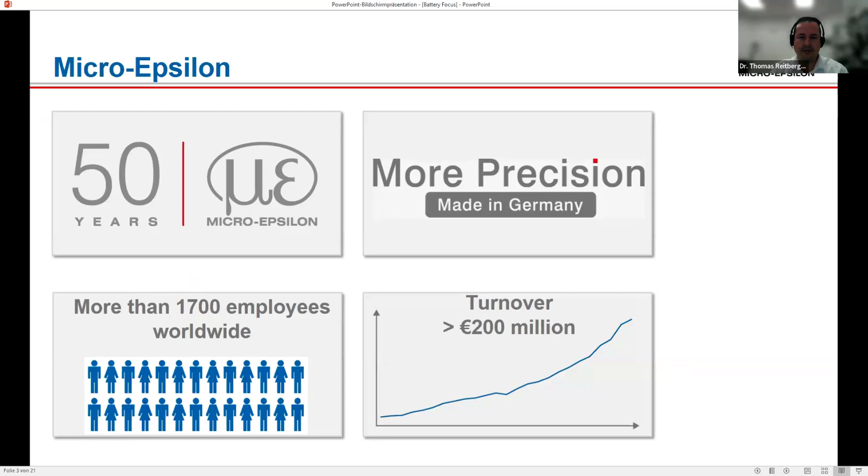And we do this by a lot of sensor systems, and we will also have a quick look at our portfolio here. Nowadays we are more than 1,700 employees worldwide, and we also have over 200 million euro in turnover. So perhaps more exciting for you is the product range we have. As Carl said, it's one of the broadest product ranges in the market.

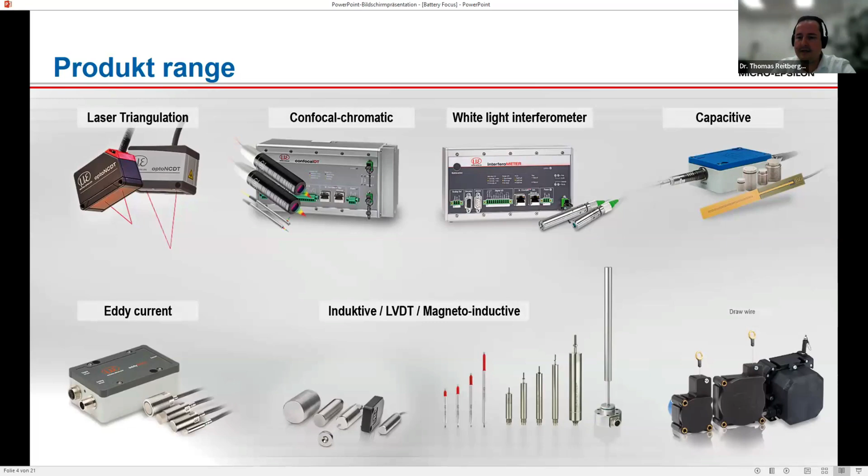It begins with laser triangulation systems. We also have confocal chromatic systems, white light interferometers, capacitive sensors, eddy current sensors, inductive, magneto-inductive sensors, draw wires. Even when it comes to 2D, 3D laser scanners, we have them in the portfolio, and the 3D snapshot sensor, one of which will be the focus today. We can even build up whole measuring systems where our sensors are integrated for bigger projects. And we have optical micrometers, fiber optic sensors, color sensors, thermal imagers and pyrometers, and also laser distance sensors. So as you see, the portfolio is really a wide range.

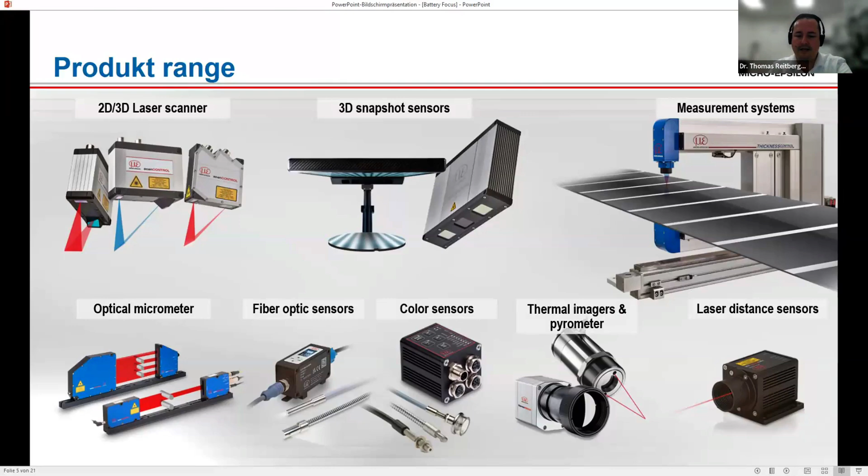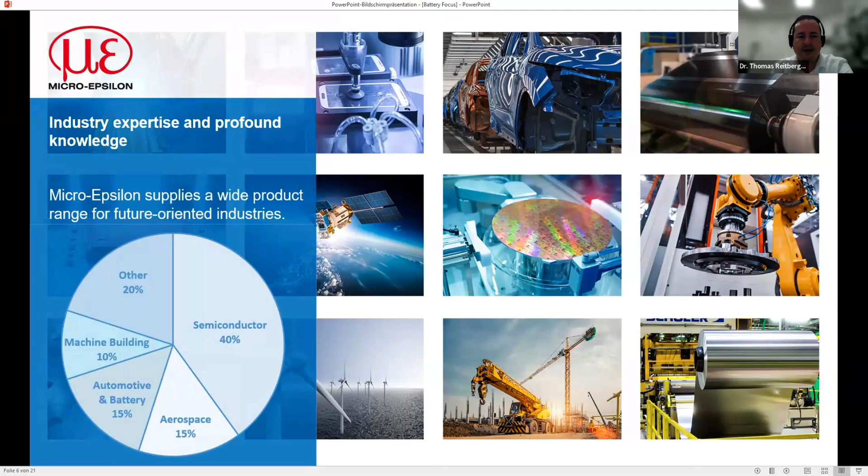But we want to focus today on EV battery production. So here is just an overview of some projects we are in. The industries we are mostly in are the semiconductor industry, automotive, aerospace, machine building, and also other industries, of course.

So we want to focus on the EV battery today. So for us, the production of the battery foil is a crucial thing. And here we have different sensors in the portfolio which could help you solve your measurement problem, beginning at a thickness measurement of the foil done two-sided, which we do confocally.

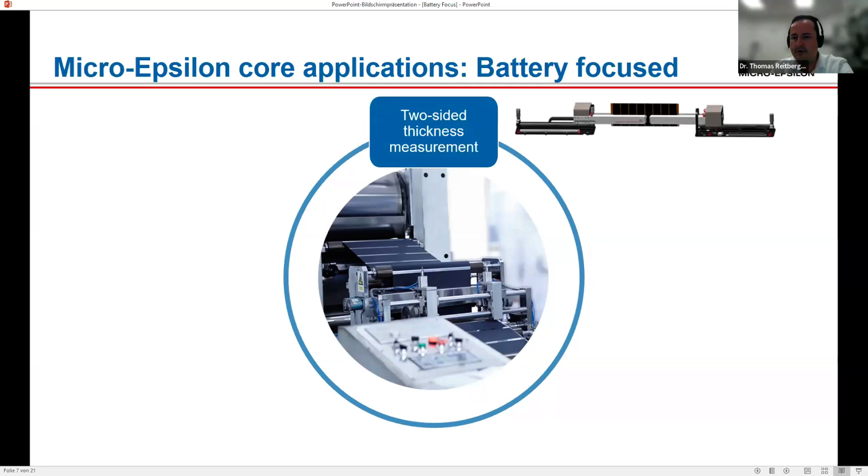And we could also measure the gap between two shiny rollers, and this is done with a special sensor especially designed for the roller mapping. Then we could also have a look at the drying behavior based on a pyrometer sensor. We can measure the heavy edge on both sides.

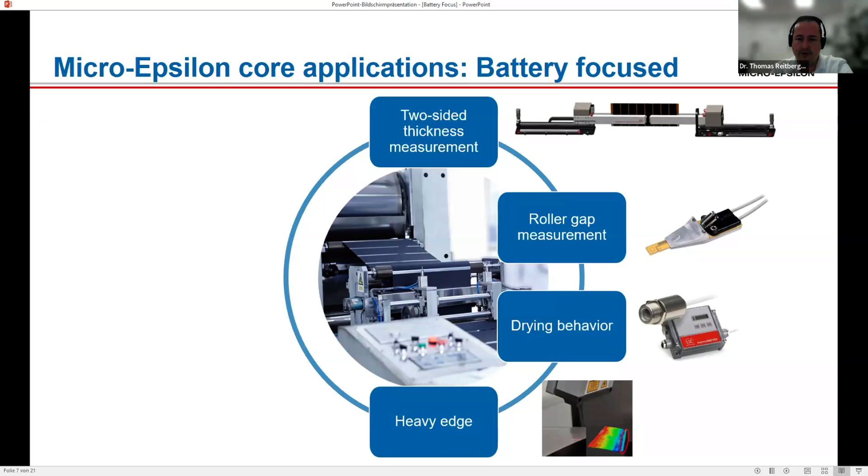So when the foil is applied here, there is often a problem that it isn't applied that perfectly. And we could also have a look with our 2D sensors here. And it is also possible to do a one-sided thickness measurement on the active material, or measure the thickness of the anode or cathode material, here done with a point sensor.

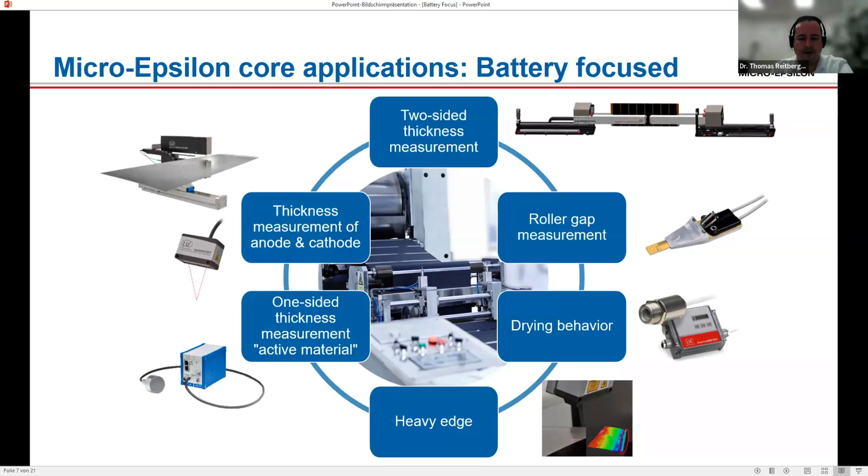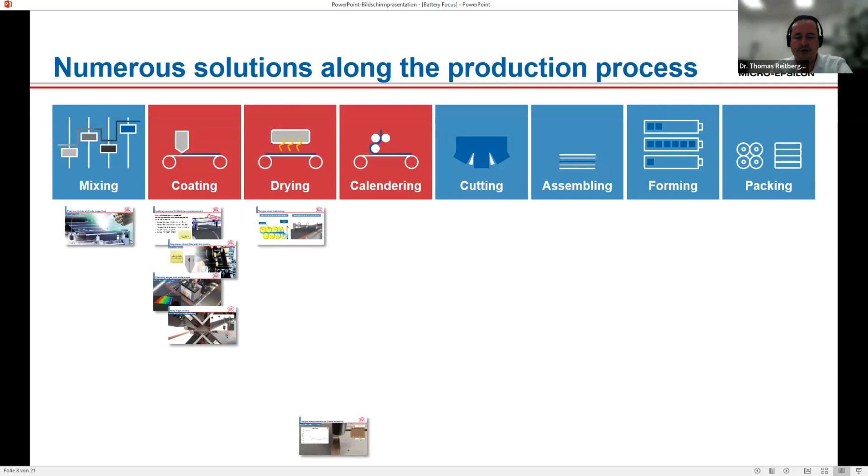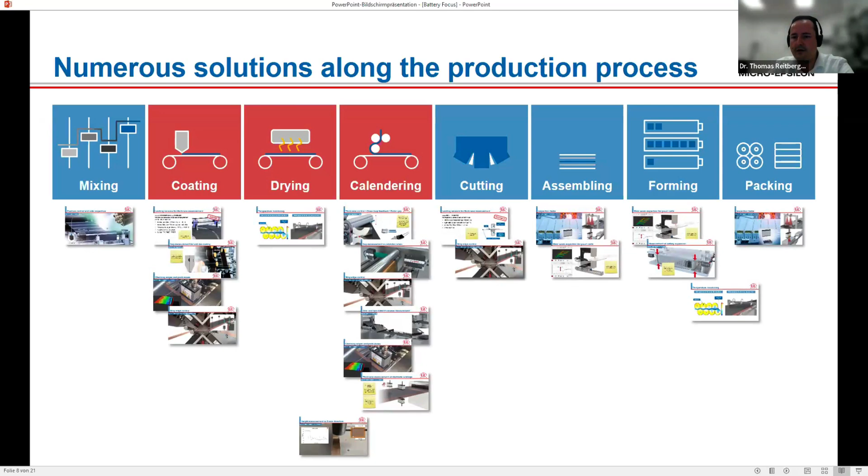So we have a look at the whole production process shown here. For us, it begins with the mixing, where we have solutions in this case. And the coating, where we have several projects. Then the drying process, which is controlled. Then the calendering with several projects, and also the cutting, the assembling, and then also the forming of the battery itself. And in the last step, the packaging, we can also have a look at the packaging.

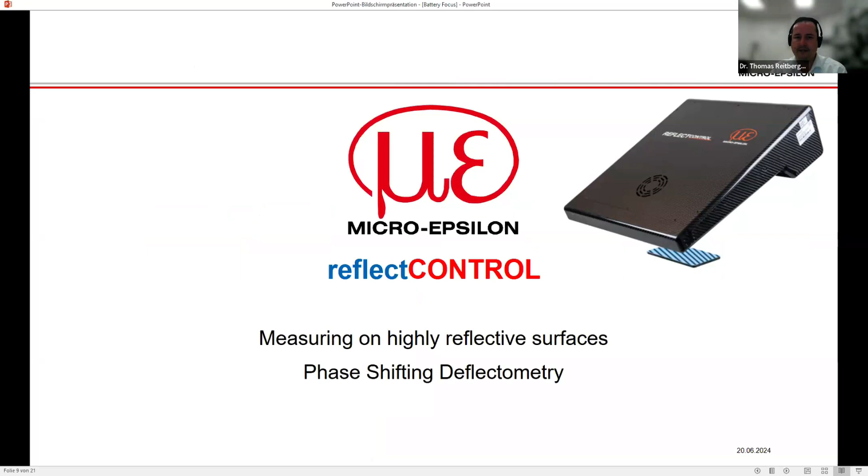So the main focus for us today is the reflectCONTROL sensor. And as I said, it is designed especially to measure on highly reflective surfaces, so especially in the EV production, we will see some examples where you can use the reflectCONTROL sensor. We call the measurement principle here the so-called phase shifting deflectometry. So what is phase shifting deflectometry?

So here on the right-hand side, you can have a look at the sensor from a little bit below. As you see, you have a screen and you have two cameras. Then you put your reflective surface below, and on the screen, a sine pattern is projected to the surface. Then it is possible for the cameras to see the direct reflection of the reflective surface and transfer this into a camera image. By doing so, you have the opportunity, on the one hand, to generate 2D images, which are an important thing for us, so that LandingAI has the opportunity to really get the defects out of it. And also we can calculate the 3D point cloud.

So how the results are generated: on top of the right-hand side, you see the projections we are doing to the target. The sine pattern is projected at least 4 times to the target, 2 times in horizontal, 2 times in vertical direction. And by overlapping these images, we have the opportunity to generate 2D images, we call them amplitude and curvature image, and also calculate a 3D point cloud.

So the recording time for the sensor is approximately 2 seconds. In these 2 seconds, the sensor and also the target have to stand still. After this, you can move your next target below the sensor and do the next measurement. And the processing time, which comes afterwards, is about 3 seconds. So to have one complete measurement with the 3D point cloud and the 2D information, it is roughly 5 seconds, always depending on how many projections you want to have and on which data processing you will need.

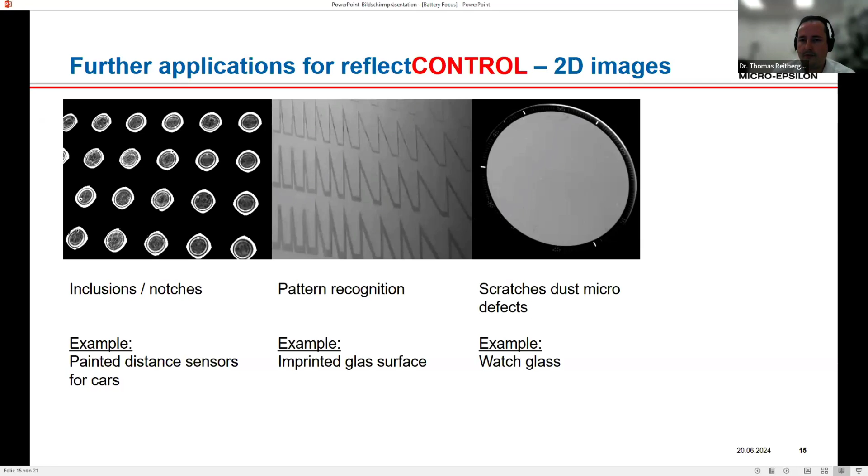You can also do measurements on glass. And in this case, we did a pattern recognition of an imprinted glass. And there the customer could see also if the pattern is formed right. Another example is a watch glass. And here, a small scratch, and it's really only a nanometer scratch, goes from the right end to the top, and this made it a scrap part for this customer here.

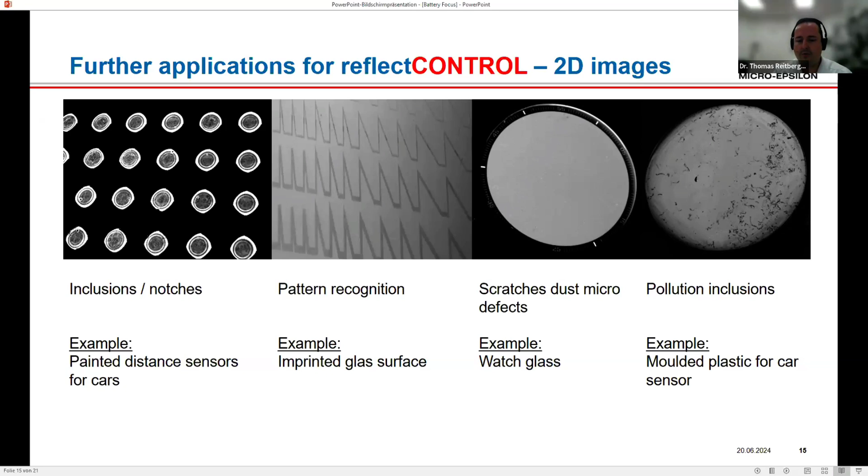And the last example I want to show you would be a molded plastic for a car sensor. Actually, it's the molded plastic for a rain sensor, which is in front of your car. And if it would be polluted as this, then your rain sensor wouldn't work correctly anymore. So this is so far what I want to show you when it comes to the 2D images.

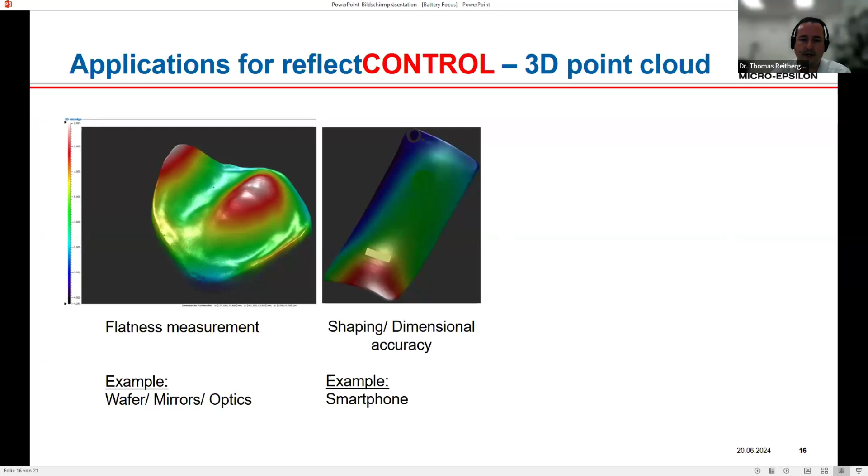And what you also can see here is what the sensor is capable of, because even these minor defects can be seen in the 3D point cloud. Another interesting example for us is the shaping and dimension of smartphones. So today the smartphone backsides and also the front sides are very shiny, and this makes it possible for us to do a measurement based on the 2D data for seeing the defects, and also 3D point cloud for having a look at the shaping and dimensional accuracy.

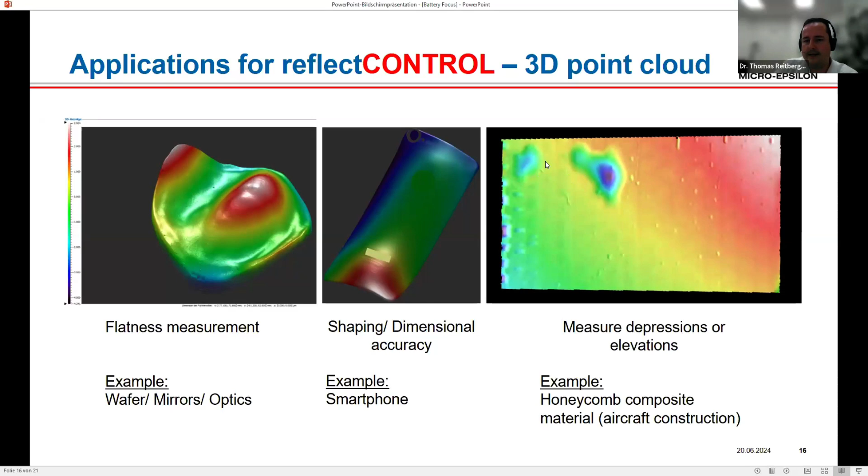And the last exciting example which we had here was in aircraft industry. You can see here a part with a honeycomb material inside, and then a prepreg material which is brought to the top, and then in a baking process it's formed out. And inside this baking process, there might be a damage to the honeycomb. And as you see here, there are 2 areas where the honeycomb has a defect. And this could also be seen and measured in the 3D point cloud.

So now you might think, okay, normally if I have a shiny surface or a glass or a transparent material, I could just go and use a confocal sensor. And you're right, you can do this. And for this, we tried to do a measurement with a confocal sensor and our deflectometry sensor, and put the images next to each other. And what you see here is a polished slab which has a dent inside a dent.

And on the left-hand side, you see with the point-to-point sensor, to have the whole surface covered of 30 millimeter to 30 millimeter field of view, you would need about half an hour. On the right-hand side, you will see the deflectometry result, which you get in about 5 seconds. So this is a massive time saving you can have here. And as you also see, the quality of the result is very comparable.

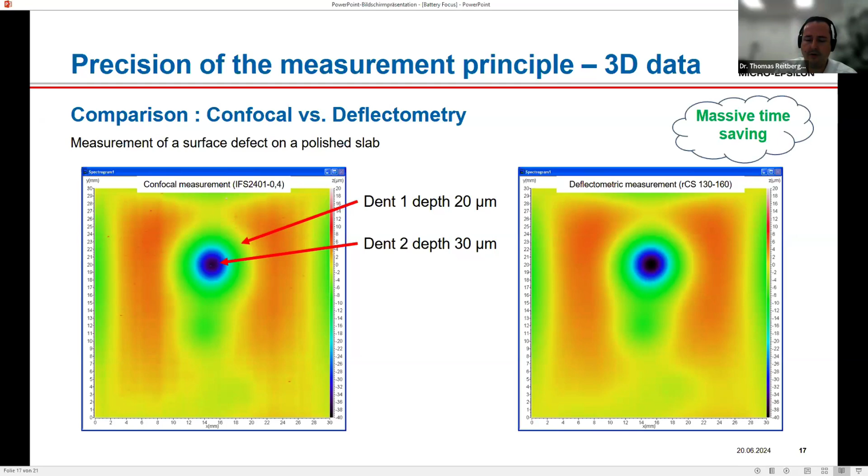And if you go one step further, you could also say, okay, but I could use an interferometer for these measurement tasks also. And yes, of course, you can do so. But on the one side, if you just use a point interferometer, you will have the time problem. And if you have an interferometer which can cover a bigger surface, normally also the preparation and the setup for this measurement will take a long time.

You see here a result which is done with a point interferometer from us, and also covering a bigger surface. It's a telescopic mirror, which we had a look at here. And if you look at the difference between the deflectometry and the interferometry result, you will quickly see that there is 50 nanometer difference. So this is, in most cases, more than enough to do it with the deflectometry.

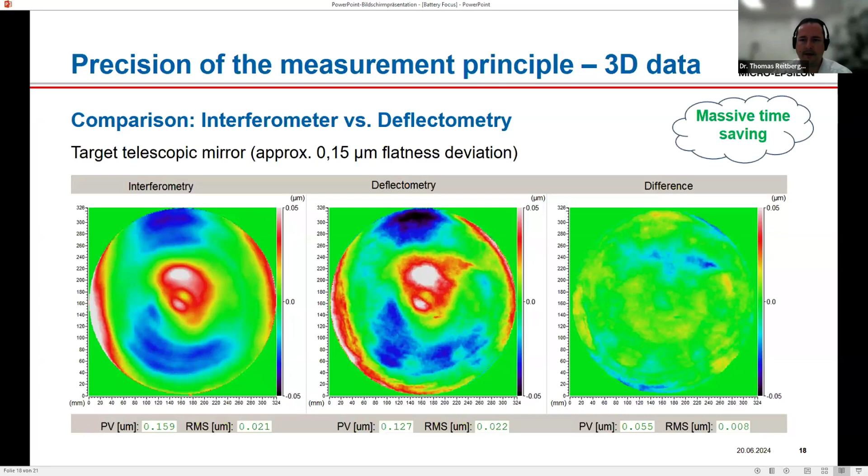So at the moment, we have 2 products when it comes to the reflectCONTROL. On the one side, we have the 2D reflectCONTROL, which has a measurement area of 110 to 245 millimeter. This is the area which can be covered with one shot. And this sensor is only capable of doing the 2D images. So you get the base intensity image, the amplitude and the curvature image out of it.

And on the other side, we have the 3D sensor, which has a little bit different measurement area, which we say is about 170 to 160. But as you see, it's a little bit trapezoid, but this is because of the cameras. They need to look on top of each other, and so this field of view is formed by it.

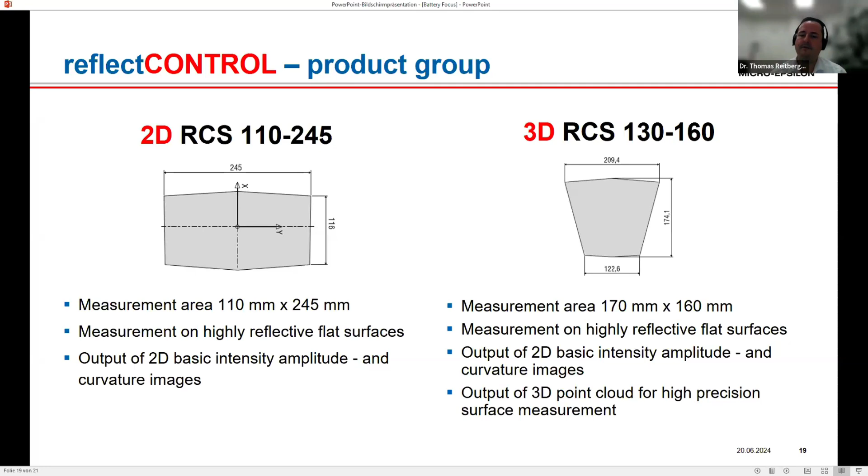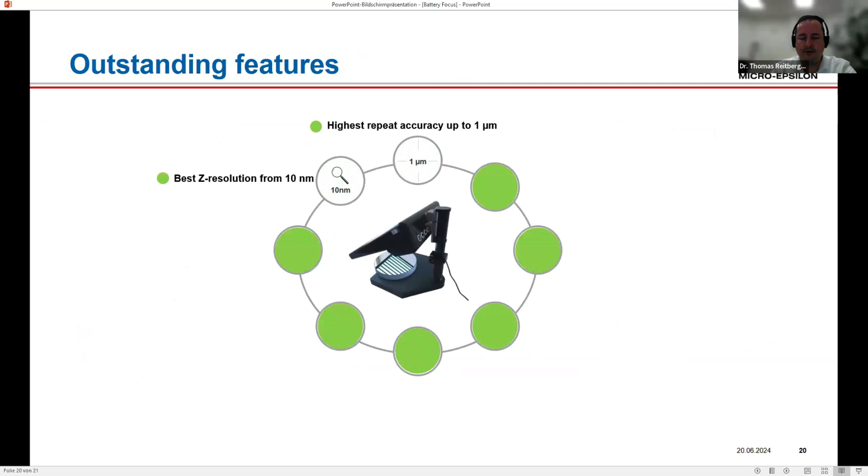So now just a quick overview of the sensor. What are the outstanding features the sensor has here? It's the repeatability, which is up to 1 micron. In most cases, it's in nanometer range. We have a Z resolution, which is beginning at 10 nanometer. We have the 3D Inspect software, and when I show you the live demonstration here, I will also have a quick look at the 3D Inspect software.

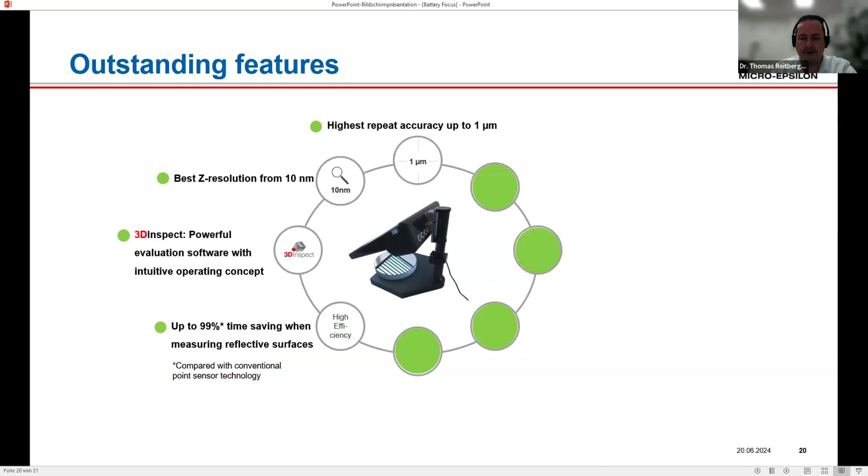And compared to most other sensors which could be used, you have a massive time saving, up to 99% here. What you get is up to 3 to 5 million data points directly out of the sensor, 3D data. And we have also an extensive software development kit. So if you want to do the solution on your own and you're using Python or C++ and stuff like that, then you could just take the sensor as a raw data sensor and write your own solution.

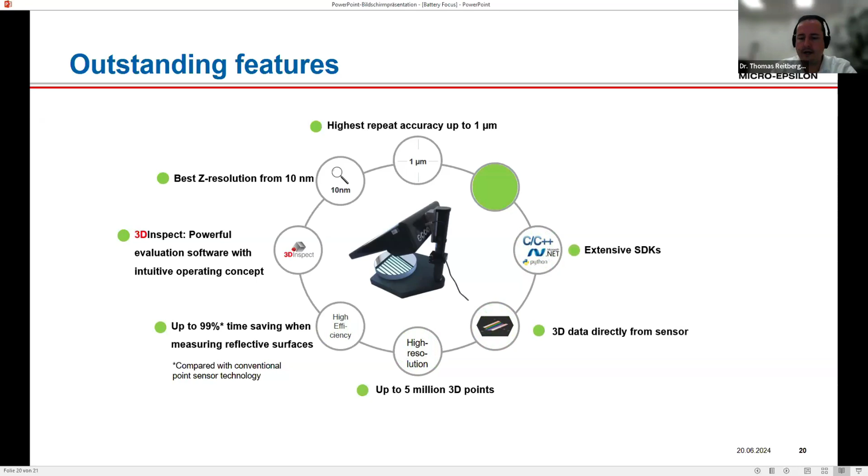And also, all of our 2D, 3D sensors have an open standard when it comes to the camera image. So we use the GigE Vision GenICam standard, and for this, it's most of the time quite easy for an integrator to get the image and do the next steps with it. So to summarize here, when a 3D point cloud is needed, Micro-Epsilon already has outstanding software for calculations on the 3D point cloud.

But for us, LandingAI is such an important partner because all the 2D images which I showed you can be taken by the sensor and are really impressive, and you see a lot of stuff there, but we don't have a solution to say where you have a defect and how big it is. And in these cases, we always knock at Carl's door and say, oh, here is our problem. Carl, can you help us?

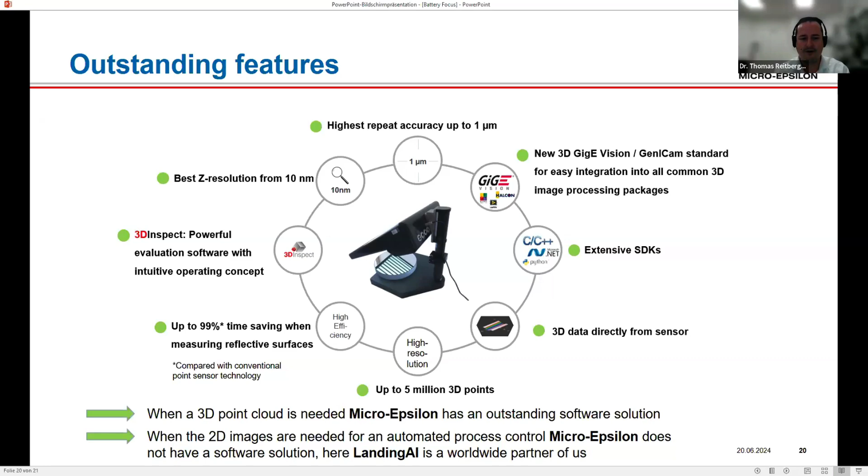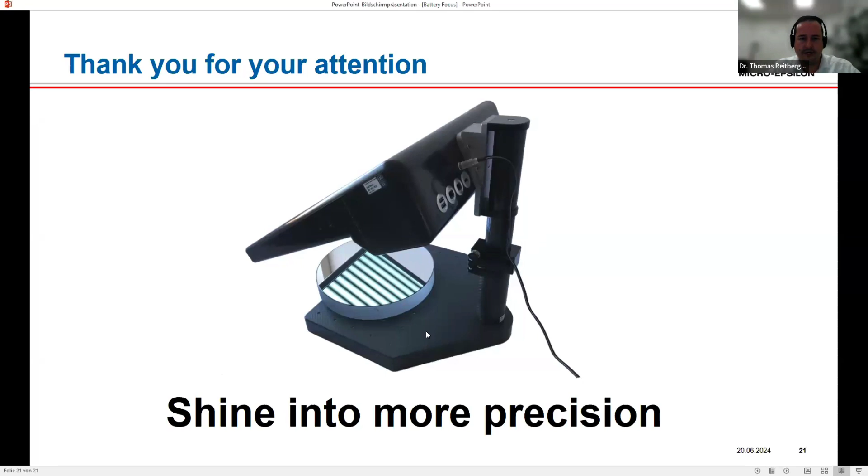So much for the presentation from the reflectCONTROL, or also a short overview. And if you have any questions after that, please feel free to ask. And I would now switch to my live presentation and show you a live measurement on a pouch cell, which I now have under the sensor, which stands next to me.

So we are now inside our 3D Inspect software, and we are inside the display image data. So what you see here is the live view, and I can also put my hand below, so you can now hopefully see my hand, and I can also turn it a little bit. And what I have to do now inside our measurement system is, in the first place, put the object in the middle of both cameras, and the pouch cell is packed inside here. So this is the area which I'm interested in.

Then I can adjust the exposure time to the best I need for an image here, and I could do some further settings. And then I have the opportunity to go, for example, to the 2D images and start a measurement here. And on the left-hand side, you can also see how long the sensor needs to do an image. Then it is reconstructed here. And what you now get from us, as we've seen in the slides, is the base intensity image. So more or less the camera image.

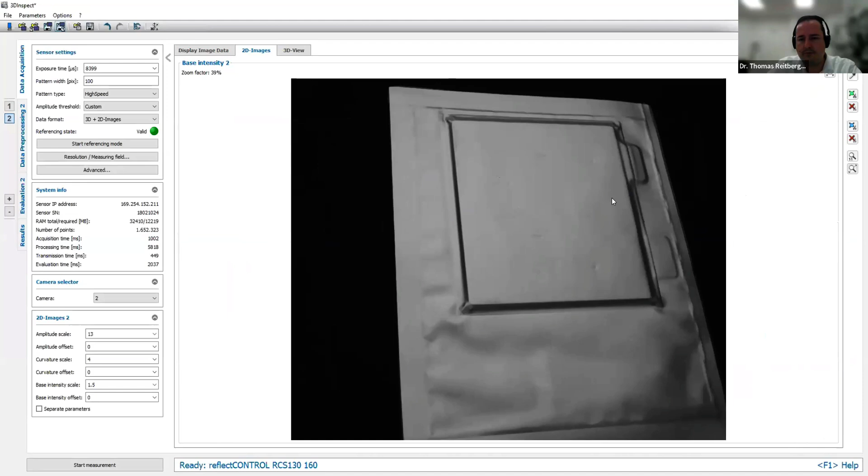I could also scroll in a little bit and have the defects shown a little bit better. We get an amplitude image where we can also see all kind of scratches, defects, some minor dents and stuff like that. And I could also have a look at the curvature image where I can go inside and also see many minor impacts, which probably won't be a failure, but something like this would lead to a scrap part, as I think here in this place. So much from what I want to show you.

What I would have to do now is just to save my images in a format which then could now further be processed by Carl. And with this, I would hand over to you, Carl.

Thanks, Thomas. Just a quick question. Maybe could you say a few words about trying to do the same inspection using a visible spectrum camera, not necessarily using deflectometry? What kind of images would you typically see?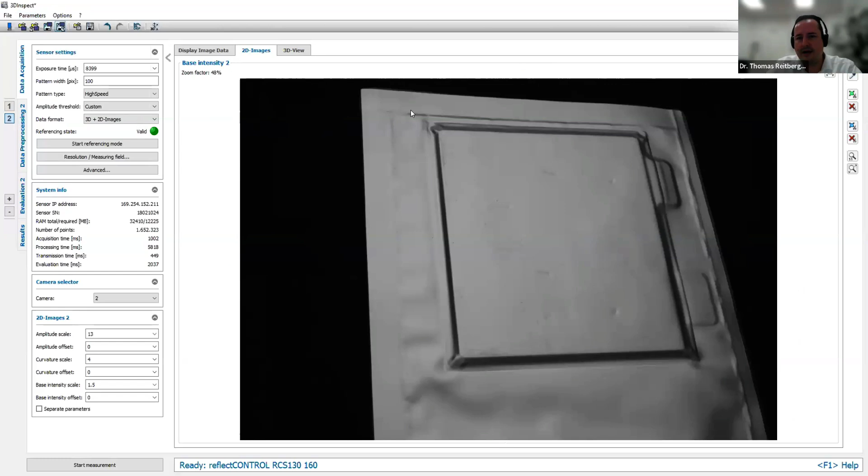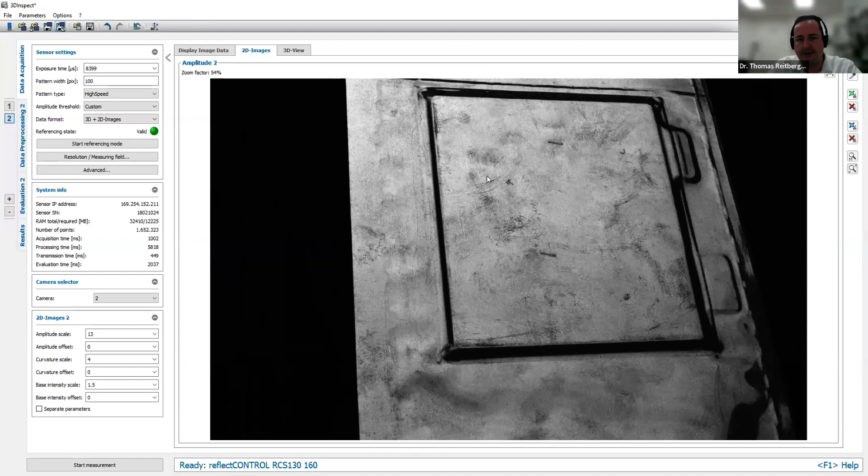Yeah, I would say here that our base intensity image is more or less what you get from a normal camera. So also in a normal camera solution, you could see some deviations here and perhaps some scratches if they are bigger. But if you would directly compare it to what comes out of our amplitude images, where all these minor defects are really highlighted, I would even say small scratches and small surface defects really can't be recognized by a normal camera solution here.

Sounds good. So just for our users, having those three types of images, you can really understand the kind of contrast you can achieve with your application. So then the next step would be taking that image set into LandingAI's platform to build a visual AI model, but having the flexibility of being able to select the right images that represent the best visible contrast is a big advantage over visible spectrum cameras. You get the complete package here. Yeah. Yep.

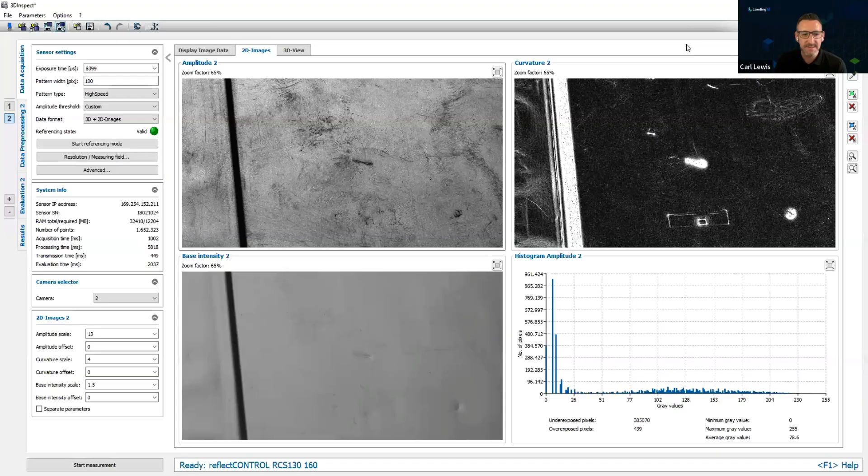Great. All right. So I think I'm up next. So I will share my screen. So I will give an overview of LandingAI, and then I'll go into the demo, but actually take the images that Thomas created, and we'll take a look at the kind of models that we can build using LandingAI.

So for those who are new to LandingAI, we help companies build, deploy, and scale visual AI solutions. We have a platform that is called Landing Lens, and it enables you to build a model quickly, iterate and deploy your visual AI solution quickly. So historically, users have had to iterate many times on a solution, perhaps using a rule-based vision library and getting the rule prescribed just right to be able to deal with the variation that's observed in an application.

With LandingAI, we focus on domain-specific data sets that customers provide. So that could be a small domain-specific data set of images used in production, or it could be a much larger domain-specific data set and building a large vision model. A large vision model enables you to create a foundation model that understands the full variation in the application. So it could be hundreds of thousands, millions, billions of images.